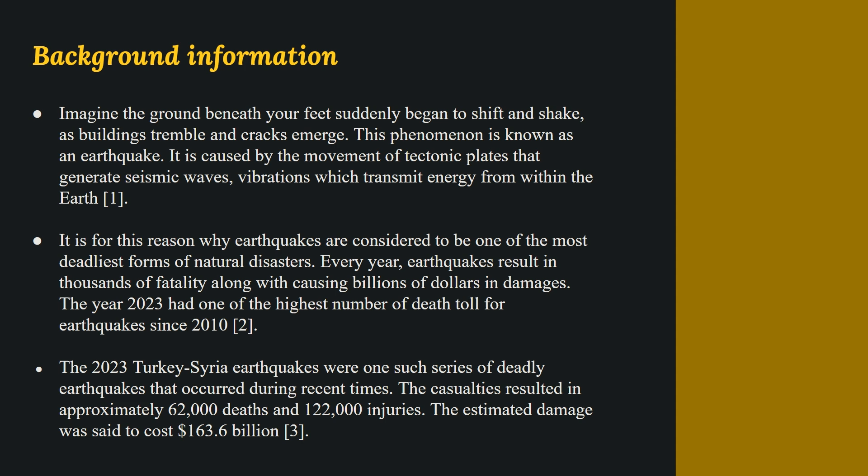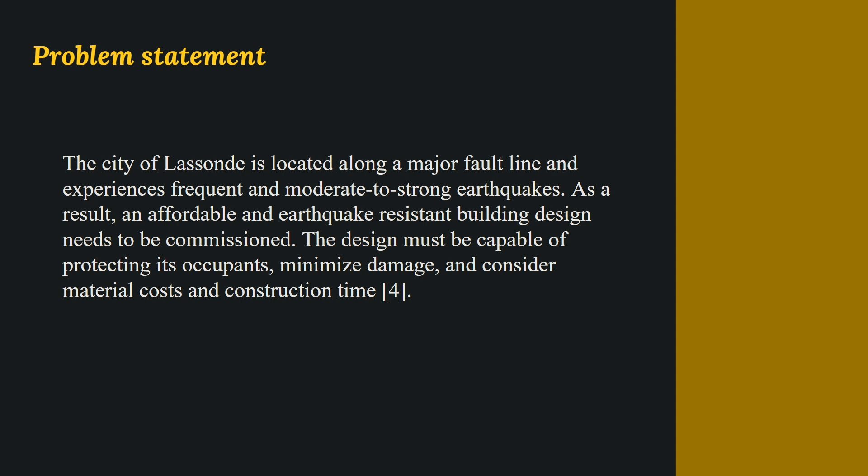The problem statement. The city of Lassonde is located along a major fault line and experiences frequent and moderate to strong earthquakes. So as a result, an affordable and earthquake-resistant design needs to be commissioned. Their design must be capable of protecting its occupants, minimize damage, and consider material costs and construction time.

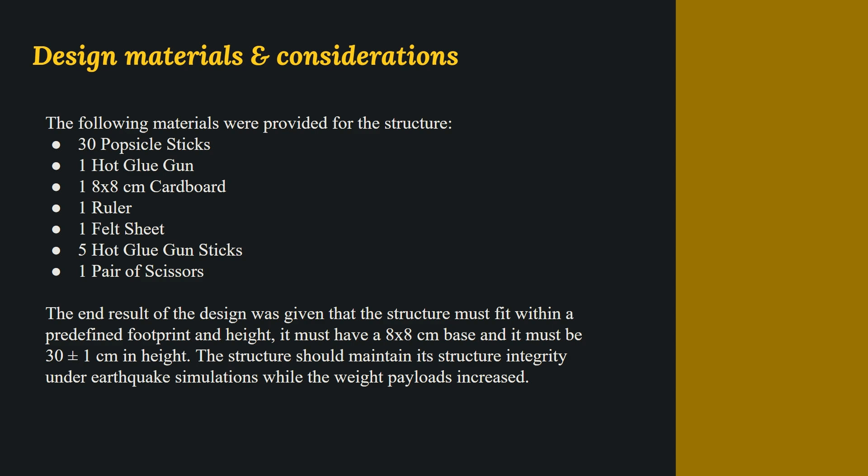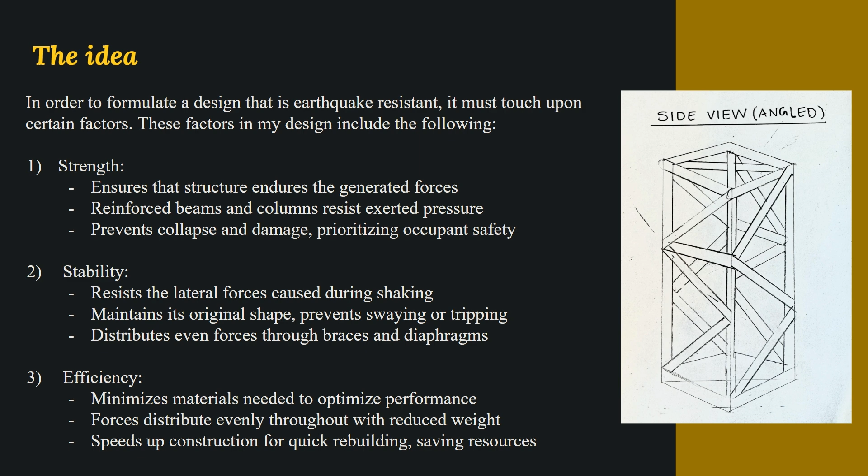So here are the design materials and considerations. So the end result was that it must have an 8 by 8 centimeter base and it must be around 30 centimeters in height. The idea. In order to formulate a design that is earthquake resistant, it must touch upon certain factors. So these factors being strength, stability, and efficiency. And attached is the photo of the blueprint of what the structure would look like.

Characteristic number one. A damping device refers to a system which absorbs seismic waves created by earthquakes. As a result, the structural integrity is safeguarded, as structural damage is minimized and occupants are protected from severe injuries. So, in order to incorporate a damping device into my design, I had to purchase an additional cardboard base.

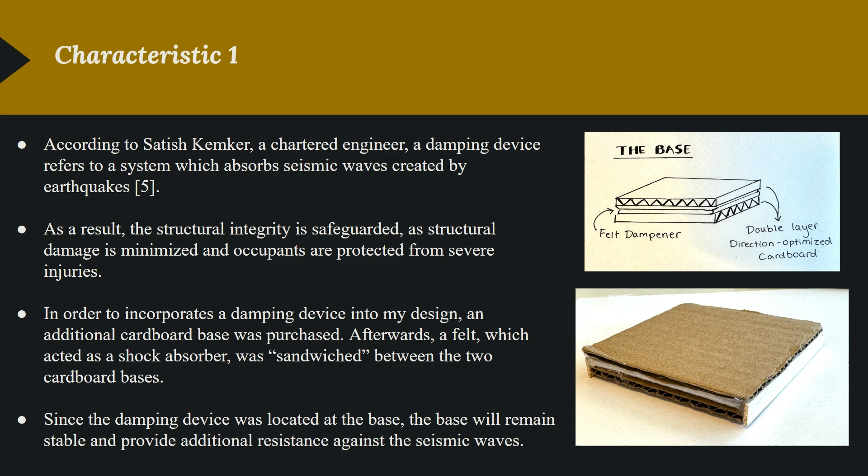Afterwards, a felt which acted as a shock absorber was sandwiched between the two cardboard bases. Since the damping device was located at the base, it will remain stable and it will provide additional resistance against the seismic waves.

Characteristic number two. Diaphragm refers to a structural element which consists of a surface, which transmits horizontal forces that are produced by earthquakes into vertical structural elements such as beams or columns. The diaphragm acts as a force distributor, which ensures that the forces are distributed evenly throughout the building.

In order to create a strong diaphragm for my design, I had to use four popsicle sticks and they were strapped to the base with the remaining felt. The structural system will prevent structural failure by restricting any part of the structure to move independently. If any part were to move, it could potentially lead to the collapse of the entire structure.

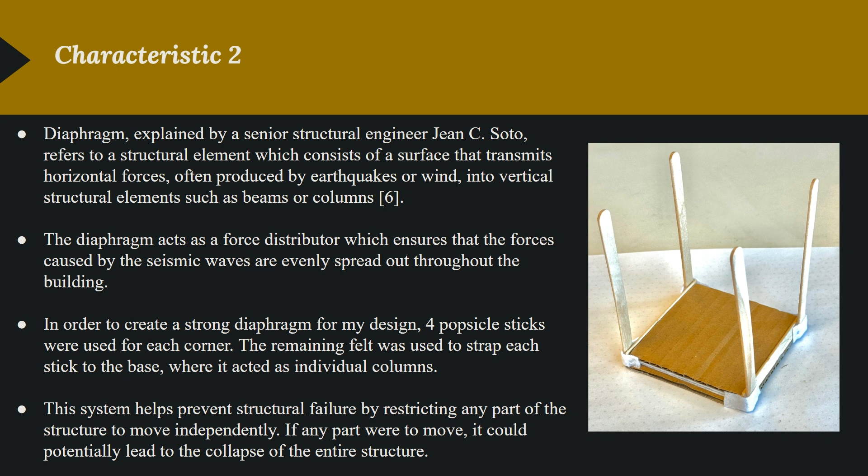Characteristic number three. So a type of bracing that is well suited for earthquake resistant structure is the K bracing. So it is a variant of the diagonal bracing. K bracing is arranged in a pattern that resembles the letter K, hence that's where it gets its name from. The K braces enhance the overall load bearing capacity, which ensures that it withstands any forces that attempt to laterally push or pull the structure.

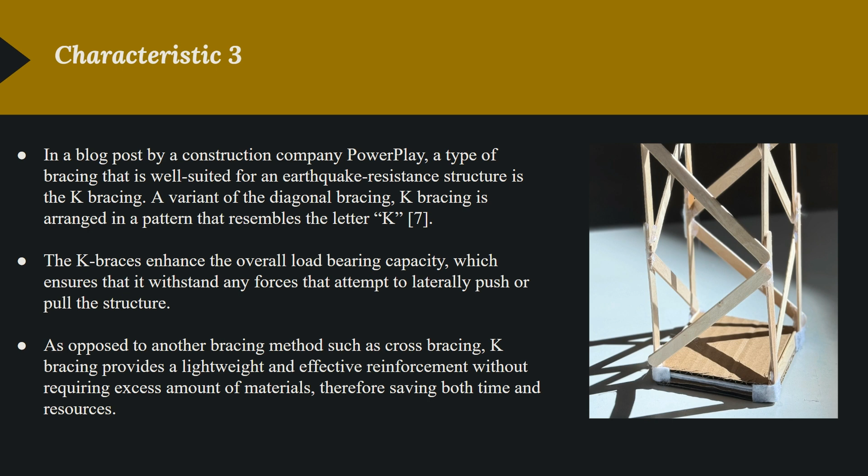As opposed to another bracing method, K bracing provides a lightweight and effective reinforcement without requiring excess amount of materials, therefore saving both time and resources.

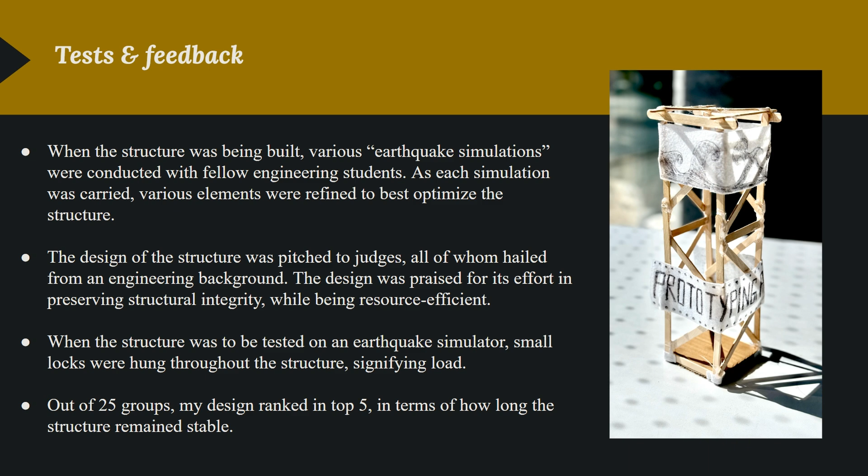When the structure was to be tested on an earthquake simulator, small locks were hung throughout the structure, which signified the load. And then out of the 25 groups that pitched their ideas, my design ranked in top 5 because of how long the structure remained stable during the simulations.

Aftermath. At the end of the day, building structures is not all about what designs or materials are used, but also about security. The blueprint that I developed offers more than structural stability. It offers a sense of hope and security for when the unexpected occurs. As an engineering student, I strive to abide by the engineering code of conduct to ensure the safety and well-being of others, especially to those who are in need.

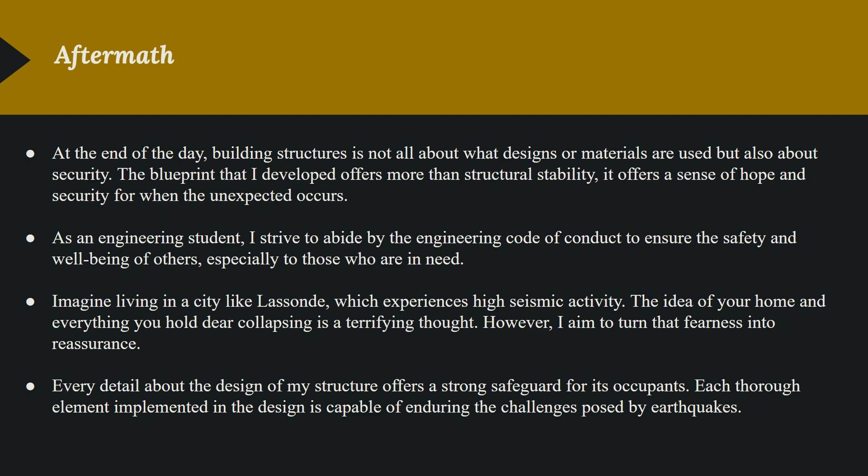Imagine living in a city like Lassonde, which experiences high seismic activity. The idea of your home and everything you hold dear collapsing is a terrifying thought. However, I aim to turn that fear into reassurance. Every detail about the design of my structure offers a strong safeguard for its occupants. Each thorough element implemented in the design is capable of enduring the challenges posed by earthquakes.